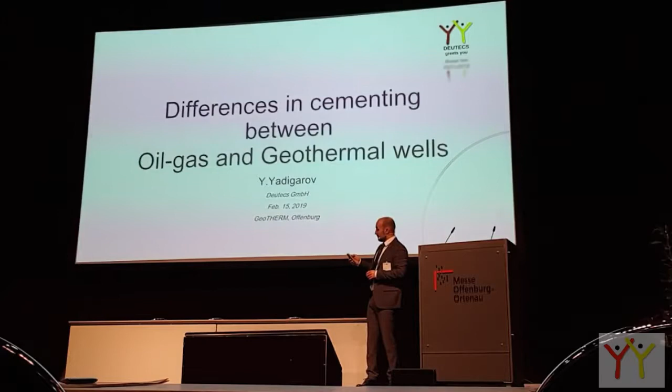The company we started in 2017, and it's 1.5 years. We are now in Germany, small startup company, and since one month we have opened an office in western Ukraine. At the moment it's one of the regions picking up. We have a small but safe team in Ukraine doing some acidizing jobs, doing some cementing jobs. We have two coiled tubing units there, and we supply them with coiled tubing equipment and so on. And of course a full range around stimulation, acidizing, everything about cementing and tools for the same industry, for oil and gas, mainly in oil and gas.

It's a shame, but at the moment we are still 100% in the oil and gas industry. About cementing and stimulation, you can read what we do. We do pretty much everything in the back office, but we don't have ourselves heavy artillery. We don't have units, pump trucks, coiled tubing, but we prepare just to cast it for the customer to get it easy on board.

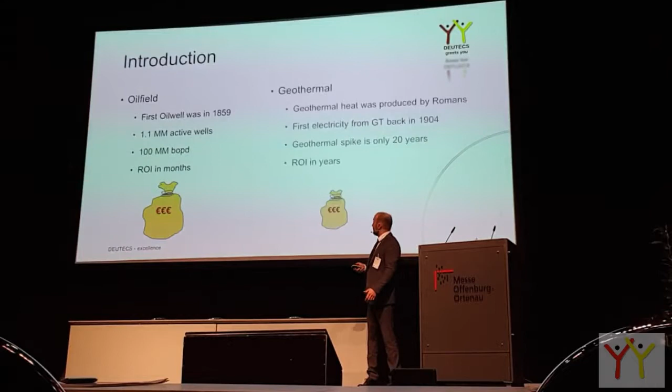Oil and gas is pretty fresh compared to geothermal. If we do have 150 years in oil field, we have 1,000 years maybe in geothermal. But geothermal came to an economical level only for the last 20-25 years. So the guys who started the geothermal business are the banks, the insurance companies, municipalities, schools.

Whereas oil and gas, it's booming, the money is there, they have a budget, they can invest into research. So why not just pick something which is laying on the ground, which is free, public, and take it to geothermal until geothermal gets to the level where they can invest a lot into this research. So the sack of money is much bigger, with higher volume, on the other side, on oil and gas. It's normal, it's a fact, and we have to live with it.

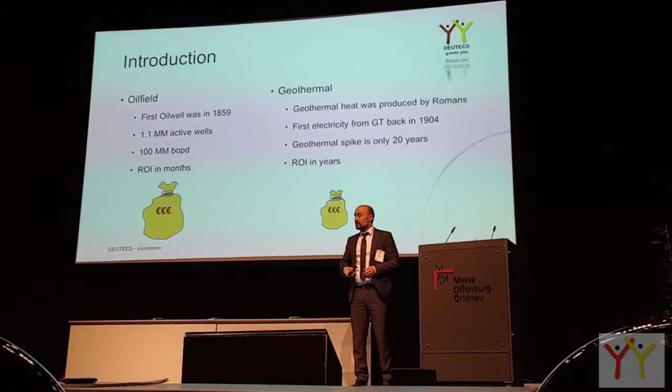So what I will be focusing on, two things: there is oil and gas, and geothermal. We have split geothermal into producing heat for municipalities, and geothermal producing power.

If we look into a typical well, normally the deeper you go, the more heat you will get, you will face it. Same thing if we talk about oil and gas: the deeper you go, it's either oil, and if you go deeper, it will be gas.

So if we simply compare geothermal heat projects with oil and gas at 2,000 meters, the normal geothermal gradient will be 3 degrees per 100, normal.

And you can say, yeah, with oil and gas experience I will knock on the door of BP, Exxon, Shell, give me all your oil and gas well information to 2,000 meters - 80 degrees, 70 degrees, 100 degrees - that will probably apply to geothermal for power. Or you knock on the door of the guy in western Ukraine, or ExxonMobil in North Germany, and they have plenty of information about gas well cementation, gas wells, well integrity. Then you can compare them with geothermal projects to produce power where you have 110 plus degrees.

So this is just the basics - you have to know which door to knock on, whom to ask.

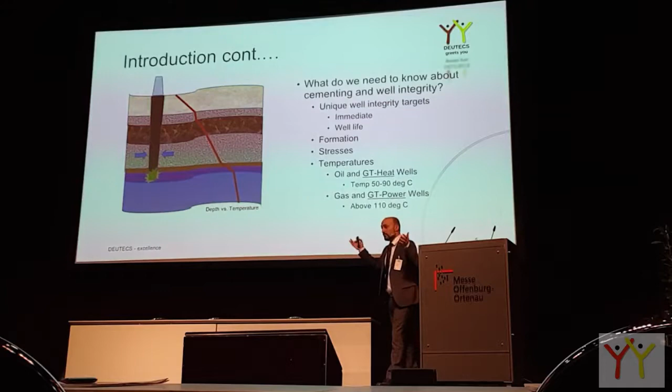And typically the well you place will be cemented, drilled and cemented. It can be acid stimulated, frac stimulated, perforated, and 10 years later the completion can be changed and so on. So you have to predict, you have to foresee what will happen to the well, how strong all these components of the well should be, including the cement sheath behind it.

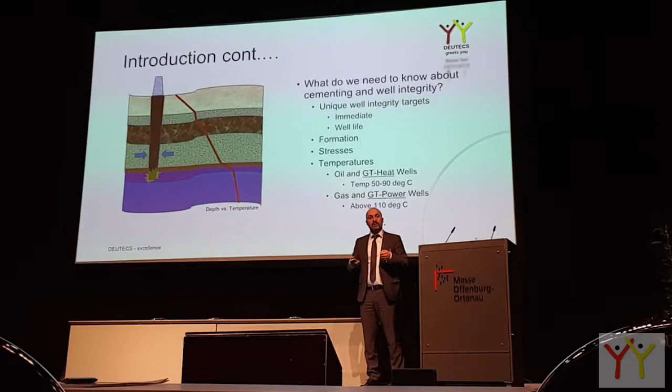So this has to be prognosed as accurately as possible. It can be expensive if you invest too much at the beginning. It can be expensive if you don't invest at the beginning.

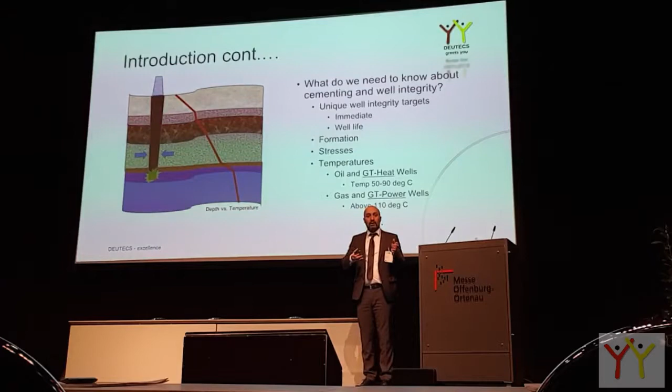So we split it this way: compare oil and gas with a project for heat, and oil and gas gas wells with a project for power.

There is cement you have to consider in two states. When you pump it, it's liquid. When you leave it for a few hours alone, it will get hard. So there will be some threshold to compare.

It is a liquid slurry, just freshly mixed slurry - there are a few parameters. And then the next morning it will be hard - you can call it cement stone, cement rock, cement - and there are a few parameters to compare for the planned cementing job, for the planned cementing cement sheath, well integrity.

So we'll go one by one. There are 12 - I should manage to finish in time.

So you say, we need a cement job - which cement to choose? You are the guy who is paying the money, right? You can choose, you can order the cement you want, but you need to know what to order.

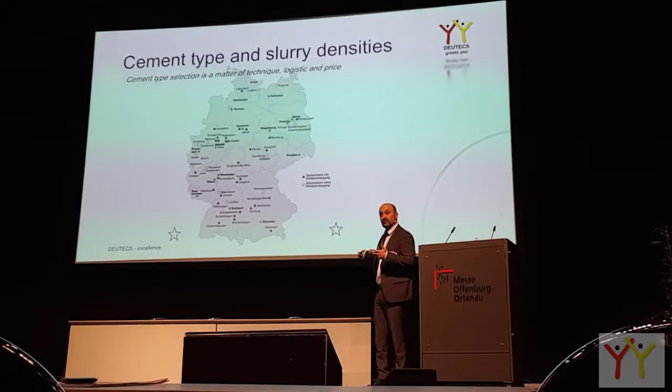This evaluation at the moment today nobody does. It's easier probably not to waste the time and call cement from Lengerich, from Dyckerhoff. Perfect cement, I agree, but nobody looks behind it. Is there a plan B?

Last quarter of 2018 there was a big problem with corrosion inhibitor in the industry, and everybody was waiting for corrosion inhibitor from one supplier. Some operations delayed, some operations shut down because there was no plan B. So similarly, if tomorrow Lengerich will do something wrong, there is no plan B for this type of cement.

But somebody has to sit down, evaluate what else is possible, how to make a cost-effective solution. Why Munich will not take cement from a plant from Rohrdorf. Why not? Just to justify it.

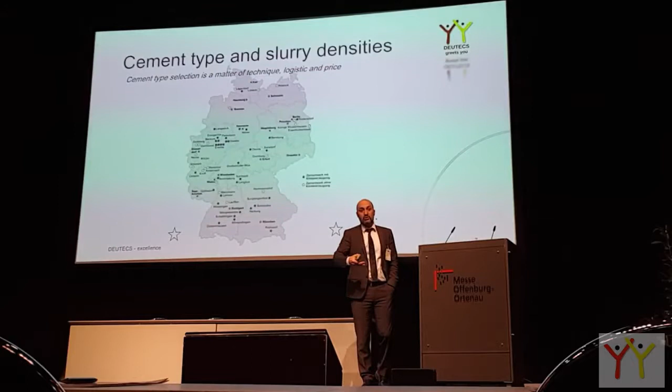We move on. Oil and gas, oil wells, and geothermal wells for heat. Honestly saying, 80% of all these factories would pass, would work. But you need to adjust, you need to evaluate it. There is no temperature, there is no gas. Most of those cements would pass until maybe 1,000 meter cementation, first 2 cement jobs.

Still, you can save a lot of money if you think there is a cement next door. Let's invest 2 hours asking them, would your cement fit for purpose or not? Not just by default bring cement from north. Local cement density needs to be just good to pump mud out, to displace mud.

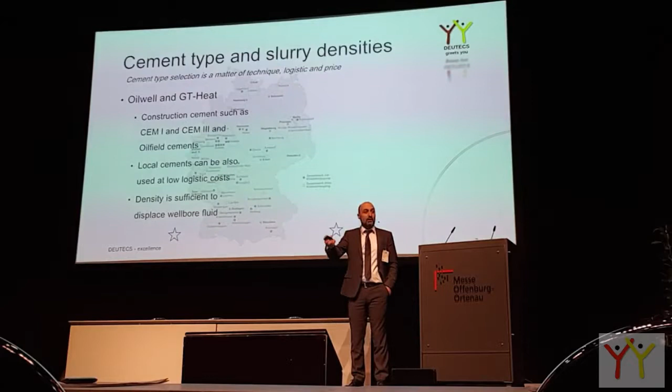Well, we talk about gas wells and we talk about geothermal wells to produce power. Then we talk about high temperature, 110 degrees plus. Then yes, you have to add a special component to make this heat temperature resistant. At the moment, this cement comes from Lengerich. It's good. There is no alternative at the moment for that in the initial stage.

But somebody has to say, well, what is the alternative? Maybe we'll do this blend mixture ourselves - down in Munich, Strasbourg, Amsterdam, and so on. The answer is this one: needs to be added silica.

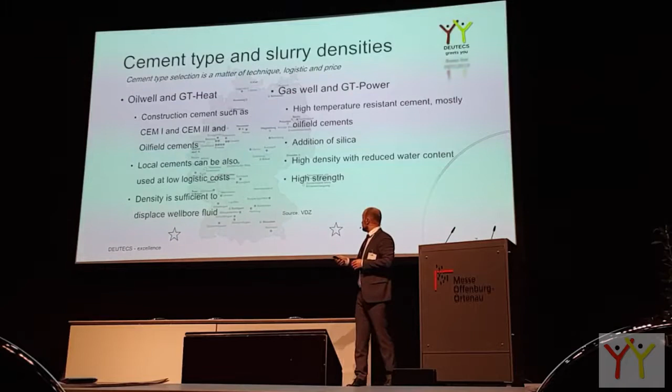Lengerich does it themselves, but there are also other possibilities, right? Thickening time, pumping time - cement has to be liquid. We pump it with piston pumps, with plunger pumps. We bring it down to the well.

It makes a U-turn here and goes. It has to be liquid. If it's jelly, we cannot pump it. This has to be considered - how important is it for geothermal wells?

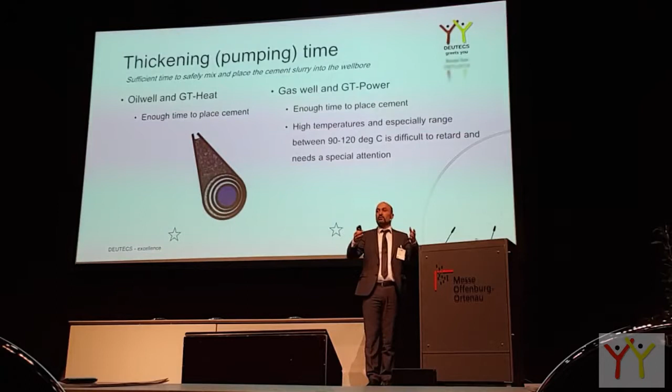Typically, there is no gas. There are not a lot of problems with these wells. The service company puts a lot of safety in it. So if the job will last 2 hours, you need 2 hours to plan for liquid time. Typically 5, 6, 8 hours is inside. So this I do mark, and further ones, with stars.

If the star is transparent, it's an important factor. If the star is gold, it's very important. So we will summarize - you will see important and very important. Yeah, it has to give us enough time to place cement and not much more.

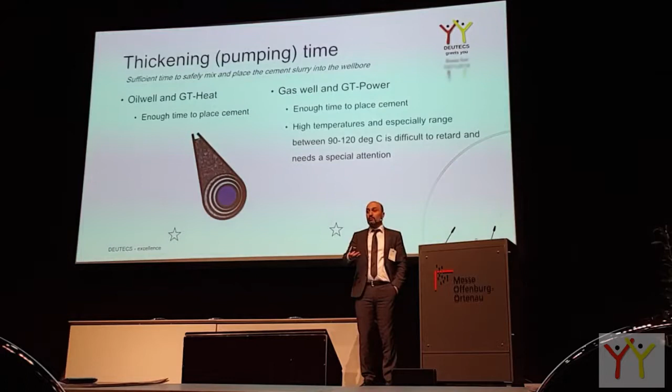In comparison with gas wells, geothermal wells for power - the more heat, the polymers will start to settle down. You have to worry about how the polymers will handle cement, will it settle. You have to think which correct retarding additive, the chemical responsible for retardation of the cement, which correct retarder to choose.

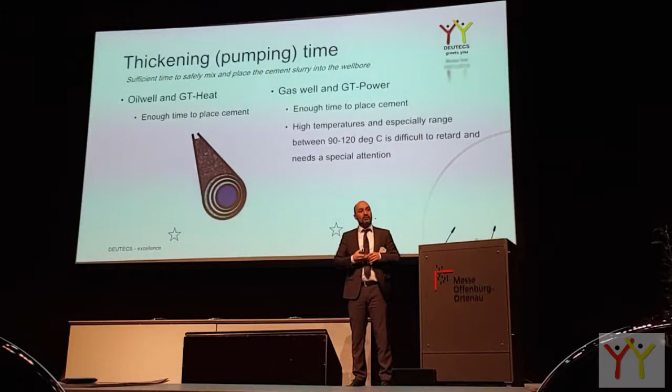There is a strange temperature window between 90 and 120 degrees. The low, medium temperature retarders are not good anymore, and the high temperature retarders are not activated yet. So this temperature is not good for cementation.

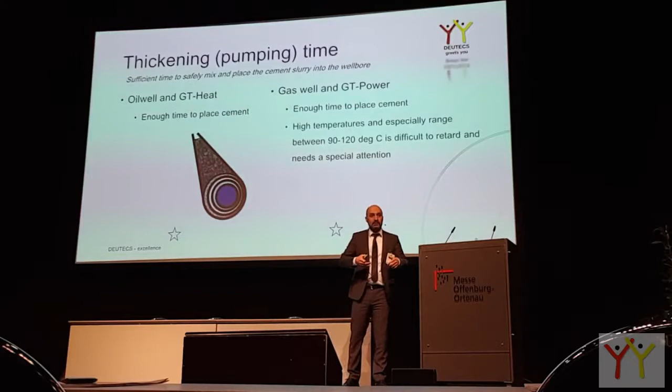Here, one has to be very careful. Needs to be a very good solution. So again, low side retarders are not good anymore, high side retarders are not activated, they're not working yet. So this 90 to 120 degrees range - be careful.

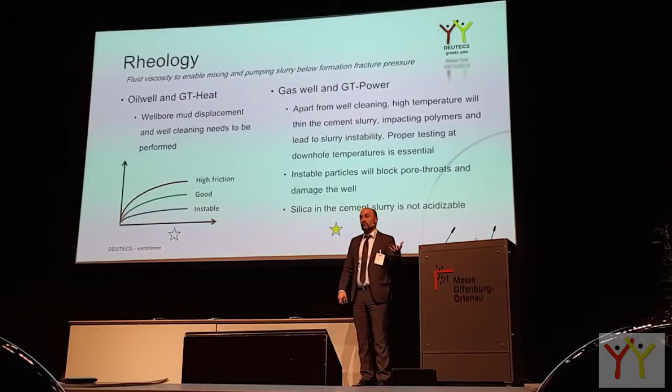On viscosity or rheology, in our words, we need to think about viscosity - friction to pumping forces, to pumping energy pressure, and to bring the slurry, the fluid, down in the well. Low viscosity will give us a chance of settling out the particles. We will damage the reservoir. We will have bad properties of the cement.

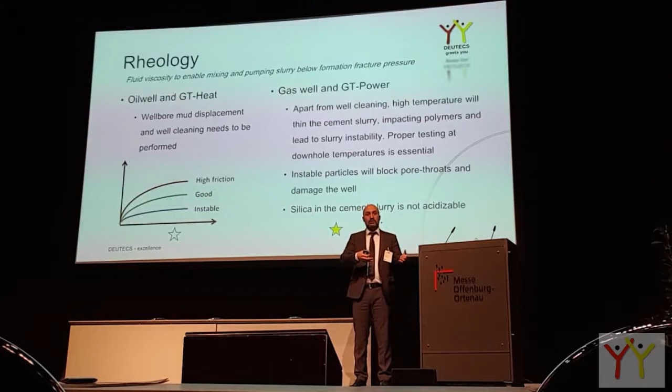It will set faster. High friction, high viscosity will mean that instead of one pump truck, you may have 2 pump trucks. You can have fracking of your well. You can have a weak link of your casing hardware somewhere damaged. So this equilibrium has to be found, and most of the time it will be simulated with software.

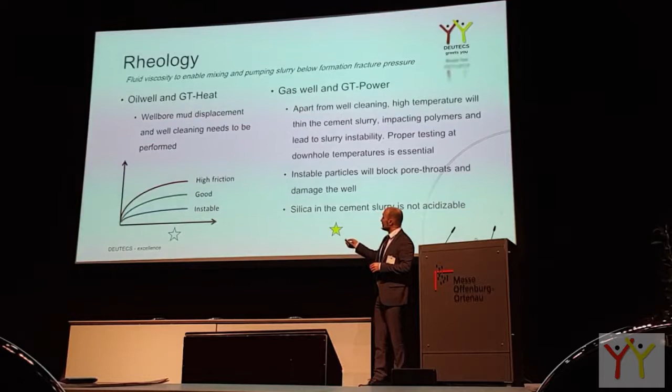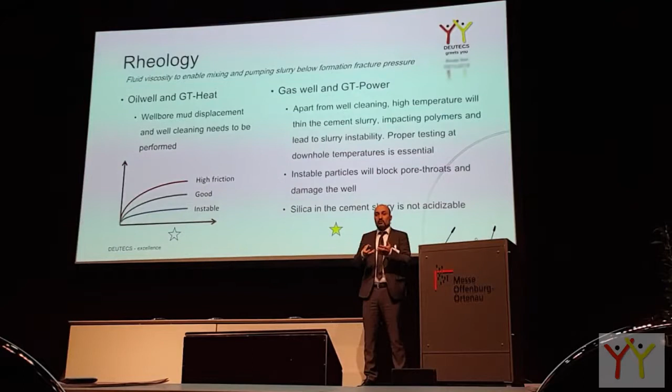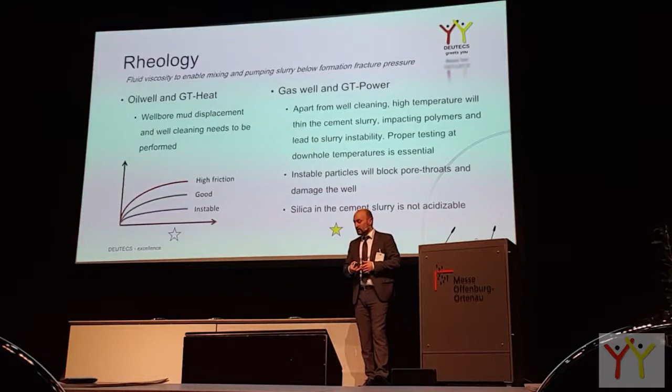In oil and gas wells and geothermal projects, this is important, but much more important when the temperature rises. When the temperature rises, you have to know what type of polymers we have. Do we have bentonite, or some high-tech polymers? Will it viscosify with temperature, or will it degrade in viscosity with temperature? This needs to be evaluated, and for high temperature it becomes really, really important.

Fluid loss. On the schematic, I just wanted to give a feeling of what fluid loss is. It's not lost circulation, it's not free water, it's fluid loss. Under hydrostatic pressure, if we have a porous formation, these two things together, hydrostatic pressure and porous formation, give us a chance of fluid loss.

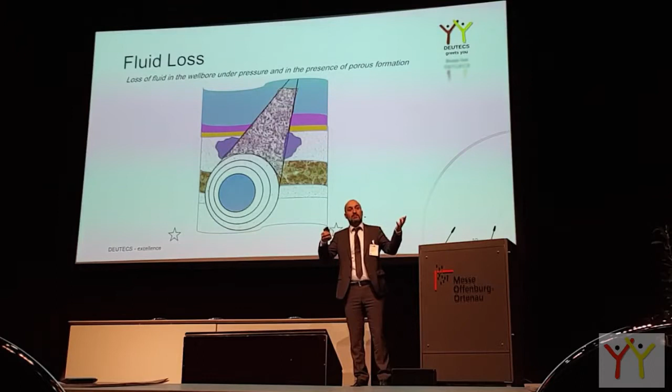So this portion of liquid will come out of the cement fluid, the cement slurry, and will escape into this porous formation, into this sponge. If we have these two together, then we have a problem: the cement will change its internal properties - rheology, thickening time, setting time, hardness, and so on.

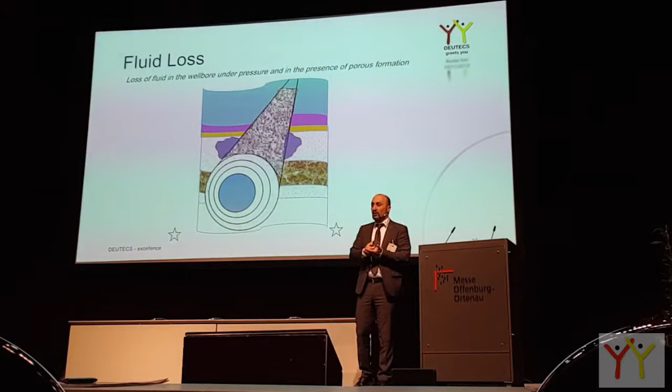Most geothermal wells are porous, and this is good, right? There is porosity, this is good. So if you have porosity, you know you will have fluid loss. So you don't need to put extra money into the system which will have fluid loss - evaluate whether you really need it or not.

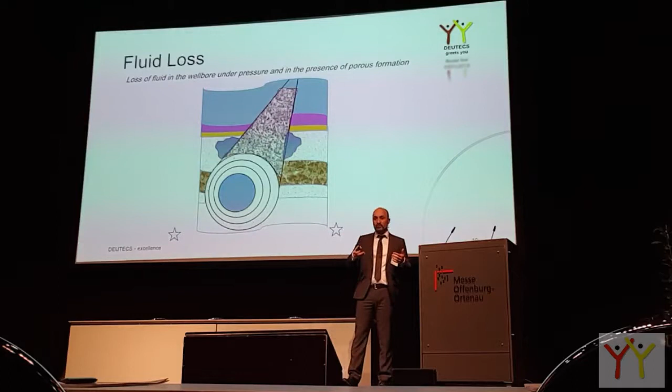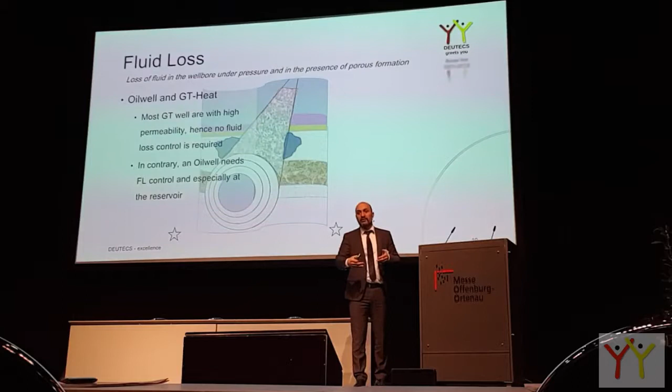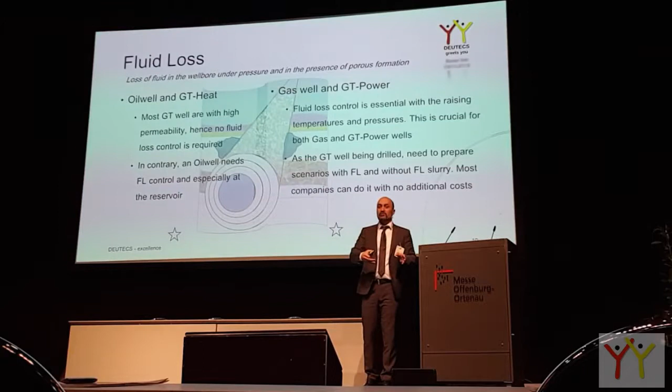It is a nice, expensive product which can make nice money and nice costs. So most of you will never need a fluid loss particle - this is a general talk. If you have unique cases, then the service company has to justify the need for fluid loss. I marked it as a transparent star. To my point of view, geothermal projects as a start don't need fluid loss control. If it's really needed, one has to justify the requirement.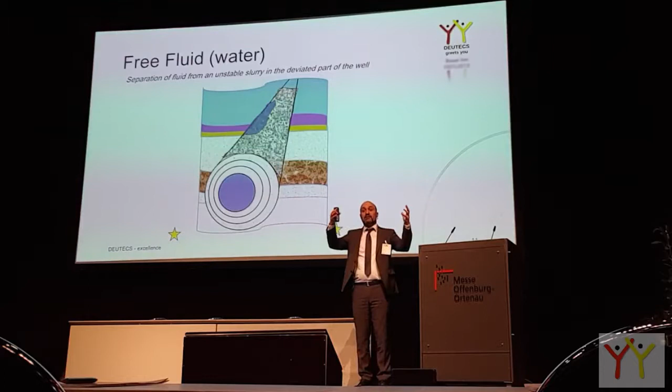Free fluid - again, if we have a deviation, we will have some fluid separation staying on the high side. If it's a long channel and the cement is hard, we may have gas migration, losses, heat exchange. We have even worse: if this fluid evaporates and increases in volume, in a few years' time we will have an underground explosion, and this pressure will collapse your casing.

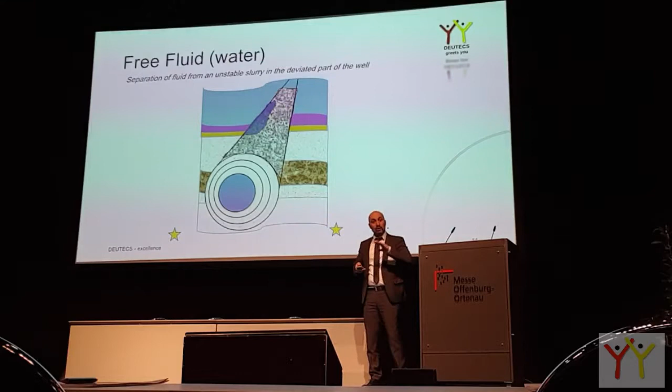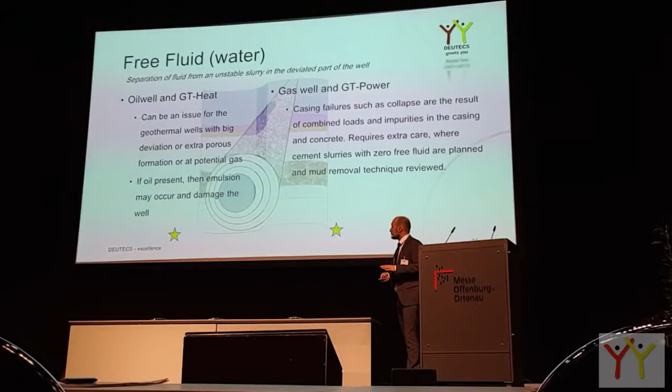So free fluid - zero, zero, no free fluid. We should not have free fluid in any of those wells. Free fluid is very dangerous for the well life, it's very dangerous. I'll make it even more clear: it's very dangerous, no free fluid, as low as possible.

Stability with cement, with temperature - stability is important. Temperature will kill the polymers, temperature will force cement particles to settle out. So yes, we need stability for high temperature. We need to think about it and take care of it.

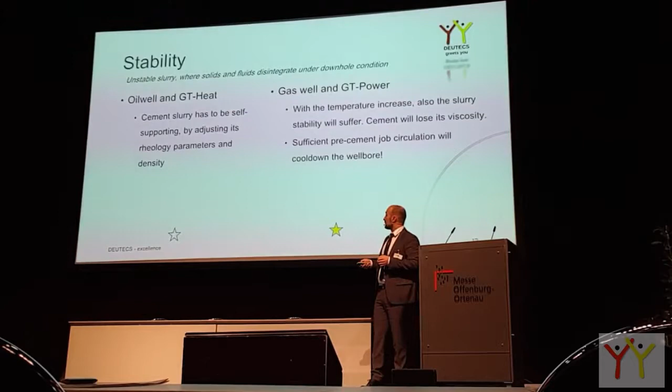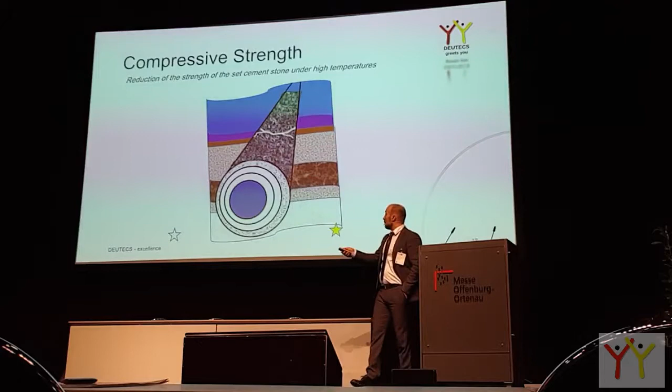I have an indicator of time, so I will move a bit faster. Compressive strength - cement is hard. Do we need to think about it for oil wells and heat wells? Any 500 psi, 1000 psi is enough to support a casing. We don't need really high compressive strength. Typical compressive strength for typical cement is 2000 psi and above, so no need to pay extra money.

Whereas for geothermal wells and high temperature gas wells, the temperature is high - at 110 degrees we have to add silica. Temperature will kill a typical Portland cement with a lot of calcium inside. So if we need good cement in 20 years, we have to add quartz, silica.

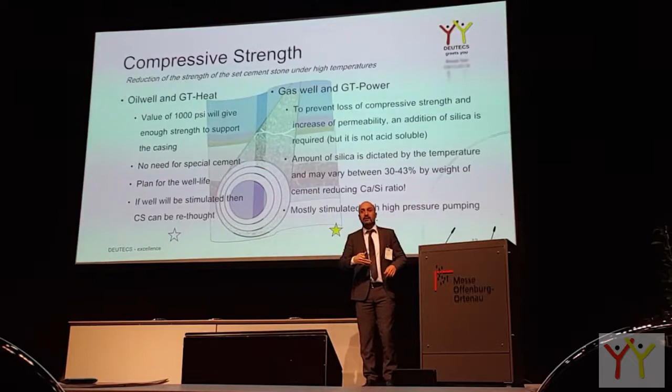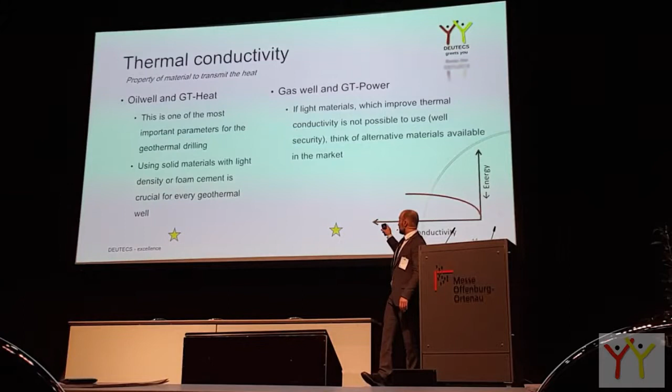Thermal conductivity - star, gold star and gold star. You drill for heat, you want the heat produced by this well brought to the surface. Not a single degree has to be lost in the time the water travels from the casing shoe to the Christmas tree. This has to be ideally zero loss, so thermal conductivity is important.

You have to measure it, check the literature, and use materials which will hold the temperature and be insulating. You have to insulate your well so this temperature comes to the surface. Use whatever is possible within your budget - foam cementing, light particle additives, even low density cement is better than high density cement in that term, because it is less conductive.

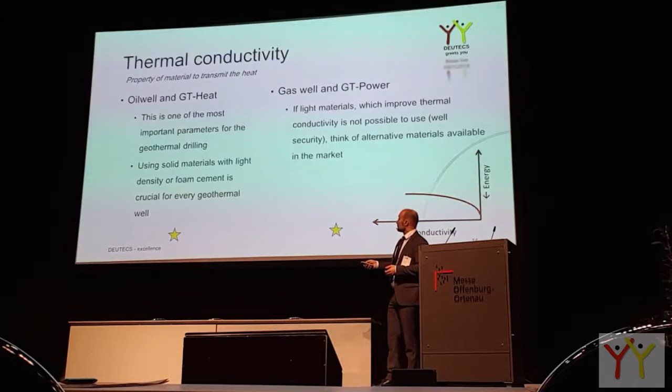And one more. Yeah, somebody's not talking to me.

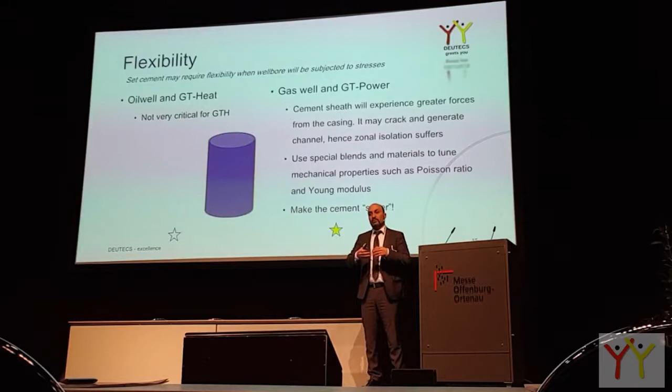Flexibility: most of the time you don't need a flexible agent for geothermal wells, unless you plan for fracturing, high temperature, high pressure acidizing, or something with pressure increase. Normally your casing will handle this. If you put pressure, release pressure, or start producing cold water, your casing will be shrinking. So you have to think what will happen with casing - will it shrink, will the balloon expand? Most of the time, no worries. But here, you have to worry about it.

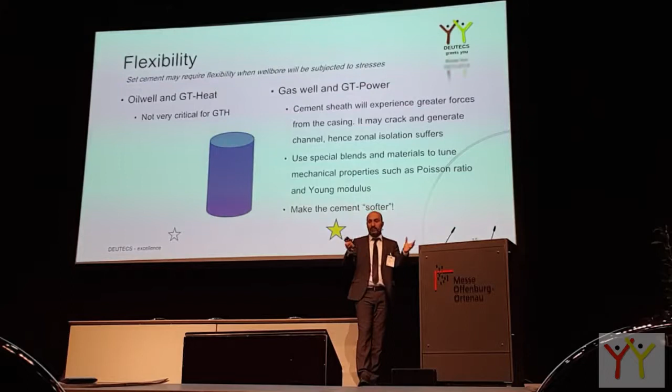What will happen with my cement behind it? Typical cement is not flexible. Metal casing will be like a balloon - it will be ballooning, contracting. Cement, once you broke it, it will stay broken. And forget about the money you paid for that.

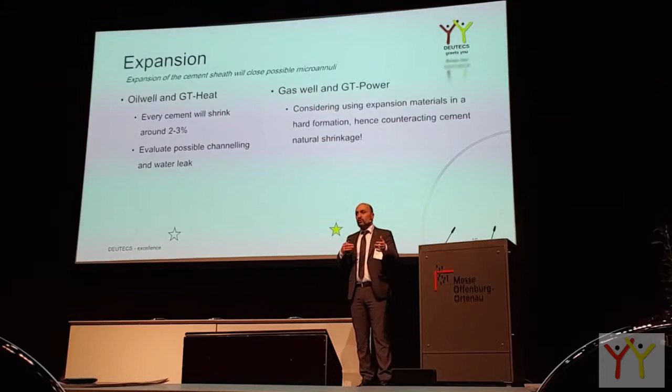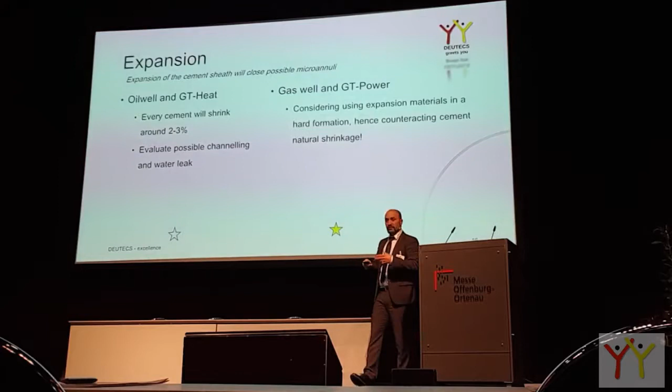Expansion: most cements will contract. So if you think that the shrinkage of 2-3% typical shrinkage will harm integrity of your well, then put some expansion material. They are not expensive - it can be just a heavy salt, heavy brine, calcium oxide, or magnesium oxide. They are not expensive but very useful. Even though you don't have contraction or shrinkage, this particle will improve your cement slurry. Again, they may add 1% of cementing cost. They're not expensive - just ask the engineering services.

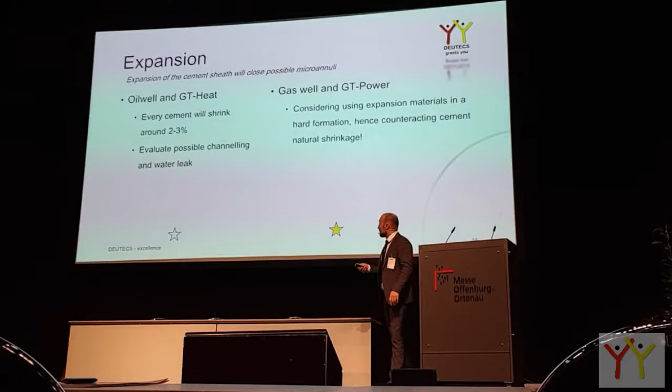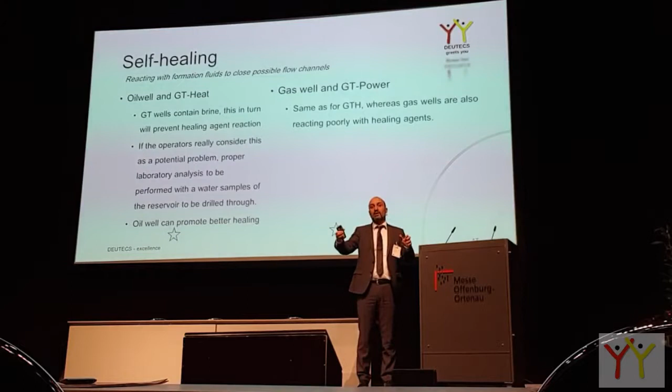Self-healing is a nice thing for oil and gas, for hydrocarbon especially. When we pump water, most of the time it's salt water. Today, most expansion materials are freshwater expanders or hydrocarbon expanders, but you pump brine, salt water down there. So the chance that this brine in contact with expanding material will expand is nearly zero. If somebody wants to use expansion materials, bring the freshwater or reservoir water and test it in your lab - will it really expand, or is it just a dream for you? I didn't mean to market it - it's a nice thing, worth evaluating. Good luck.

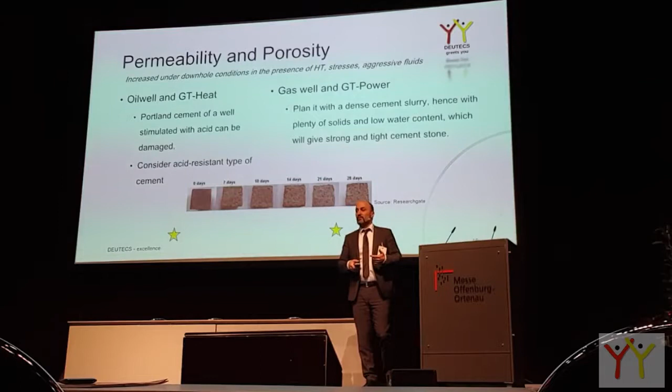Permeability and porosity are both very important. After the years, you want to have your cement hard, impermeable. It will be acidized afterward, in next month, next years. You want to have cement integrity still after a long time. So invest money in a more solid cement, invest money to block all possible migration, invest money into low water content fluids, low water content slurries. They only add to your value over the years.

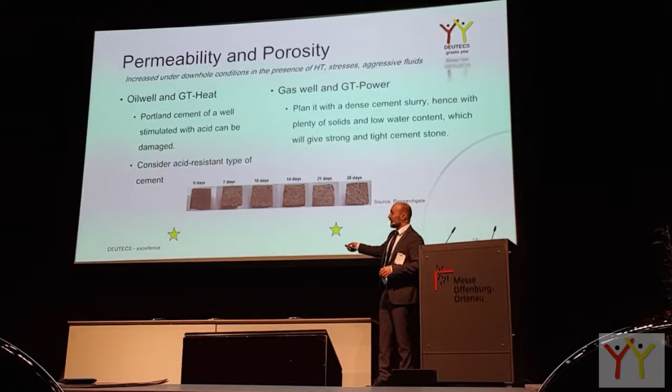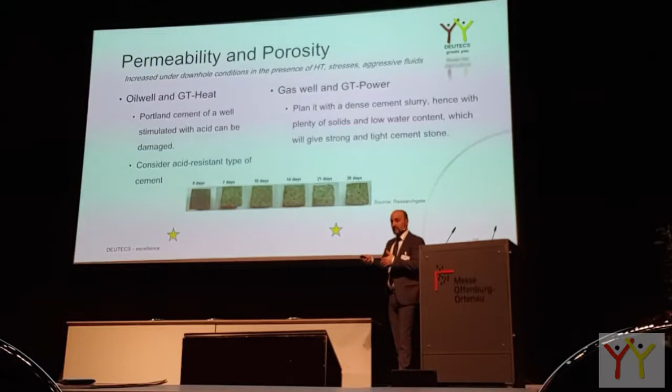This was a small test on acids. They put cement in an acid, and after only 28 days it was in this shape you can see. But we're talking about 50 years, right? Geothermal wells, 50 plus years. So imagine there will be no cement left at a later point. Invest into this study, pay money if needed.

And the summary: projects investing in geothermal for power have to invest into cement, indeed. Projects involved in the heat project can really have a lot of cost saving. You just need to have some team evaluating what your project really needs. If today the cost of cementation is between 3 to 5%, 7%, you can reduce it. You don't have to reduce it - you can buy quality. You will know what you buy.

Again, same thing: invest now rather than fixing it tomorrow. It will be much more expensive. Thank you very much. Dankeschön.